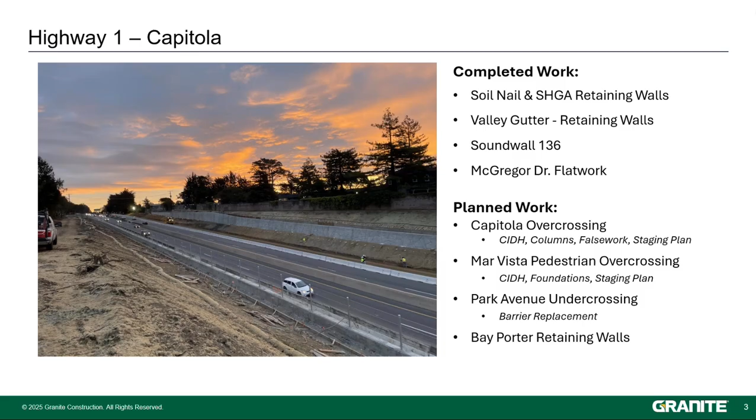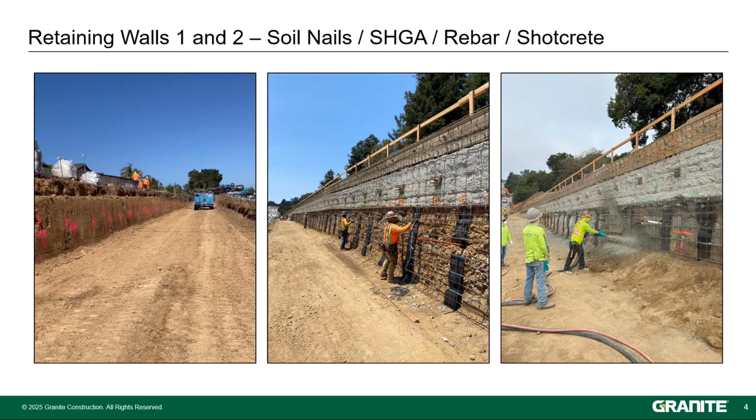Now, going back to this first one, on day 1, I remember sitting with Brian Nassar. He was trying to explain to me quantity claiming, how to scheme it, how to do different percentages, and I was trying to wrap my head around what a soil nail was, and it kind of all went over my head. I was new, I didn't know a lot. And by the end of this, I was tasked with developing the field operation report for this.

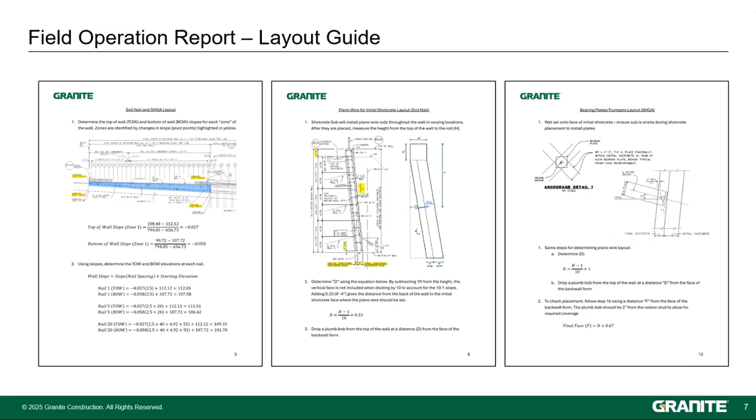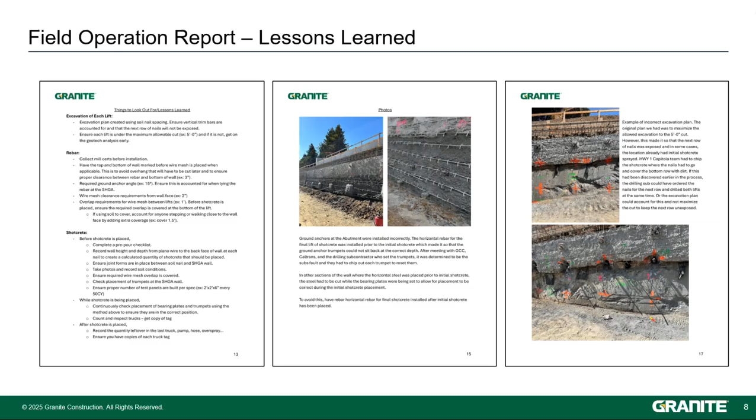And all of these photos have sections on what we encountered, what was difficult with it, what was wrong about it, how we fixed it, and also a section on if we could go back, how we'd avoid it in the future. So the hope of this is if Granite's building another wall like this in the future, this is a helpful resource to make sure those mistakes aren't repeated. Once those walls were complete, we did the valley gutter that runs the whole length of both walls.

We had in the morning the take 5 going over the overhead power. We talked about falling. Safety was a big thing here just because there was a lot going around. But this was one of my first concrete pours, aside from shotcrete, that I got to be a part of. So it was a learning experience, setting it up, being up there early, making sure light plants were set up. But this was a helpful thing that I learned a lot from.

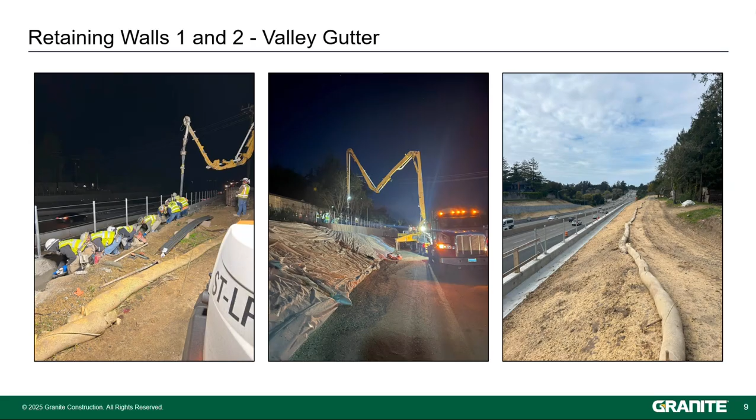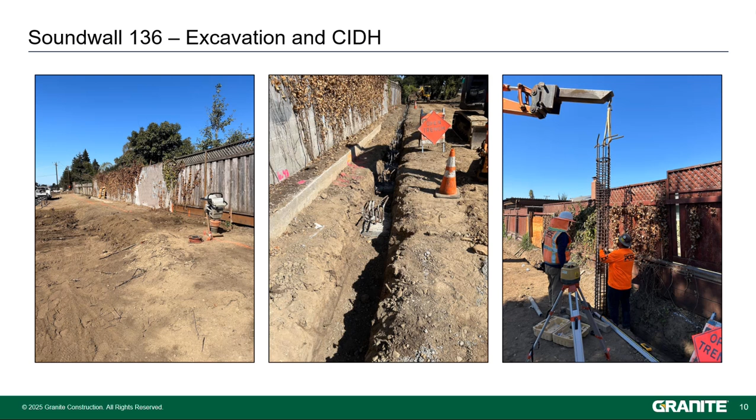We also did a sound wall, 136. So this is the photo of what the site looked like when we got there. We neat cut the trench and had our drilling sub come in and install the CIDH, which then got passed over to our mason foreman, who set up this rebar template for the vertical steel coming out. We spent a lot of time planning how to do this template to make sure that steel came out exactly where we wanted it, so that they were on the center of the cell of those mason blocks.

Just because our superintendent told us some stories about having them not line up and how it's difficult to go back and fix that mistake. So this was a big emphasis of the work plan. Then it got passed off to our mason sub, who came in and set the blocks. And then this is that finished wall that is on site today.

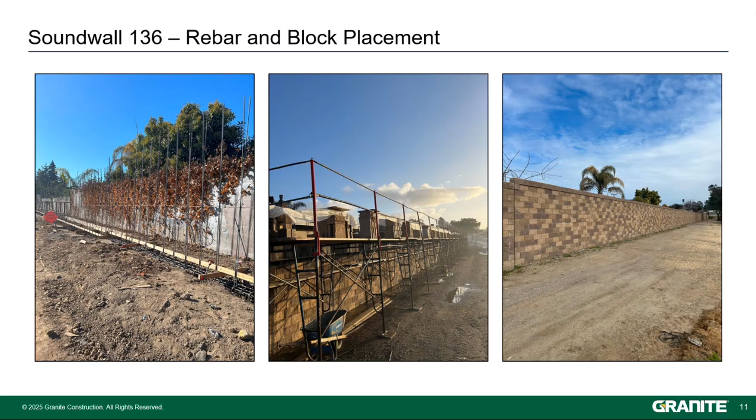So another big thing that I've been working on the last couple months has been work planning. Right as I'm leaving, we have 2 structures starting, as well as a bunch of sound walls. So I've been digging into a lot of the work planning for that. The Park Avenue undercrossing I took the lead on, where we are removing the existing barrier on the outside edge of the bridge passing on Highway 1.

This is a very complicated piece of work where we have Park Avenue, which is a county road running under the bridge, and Highway 1 running on top of it. So traffic control and working through how we're going to do this work, either night shift or day shift, and when we're going to get people in there with access, has been complicated.

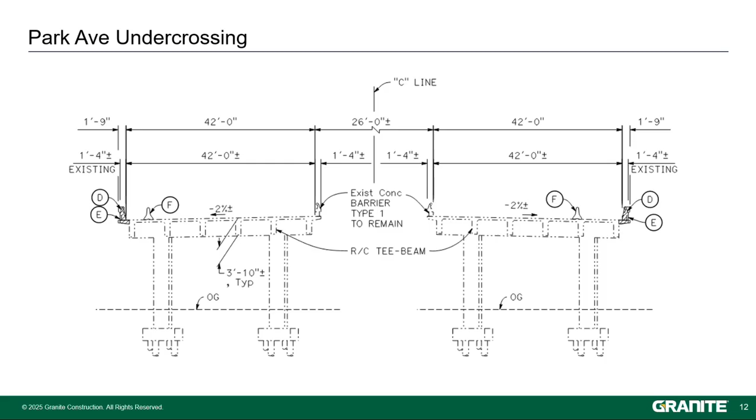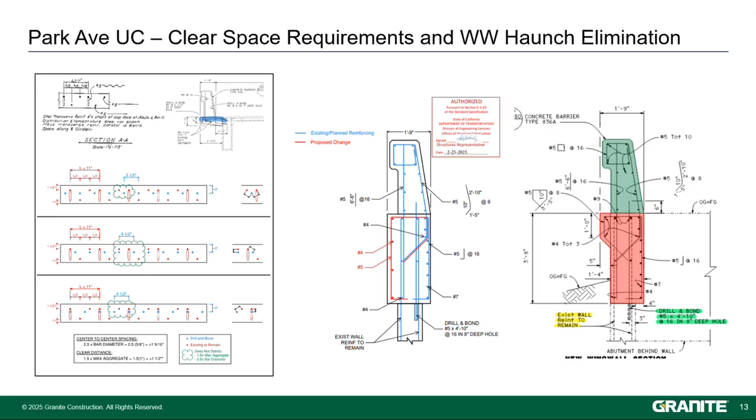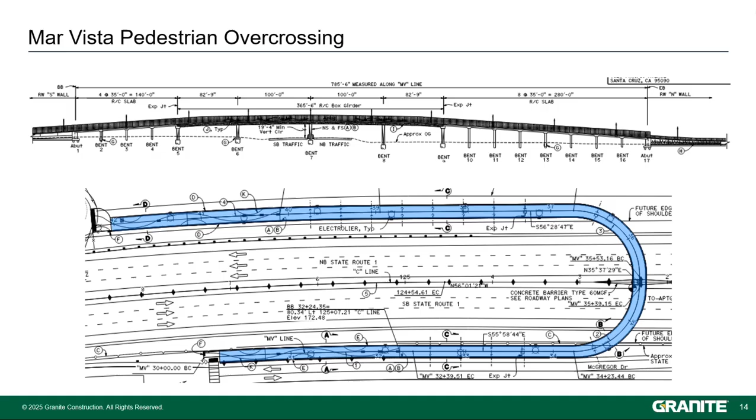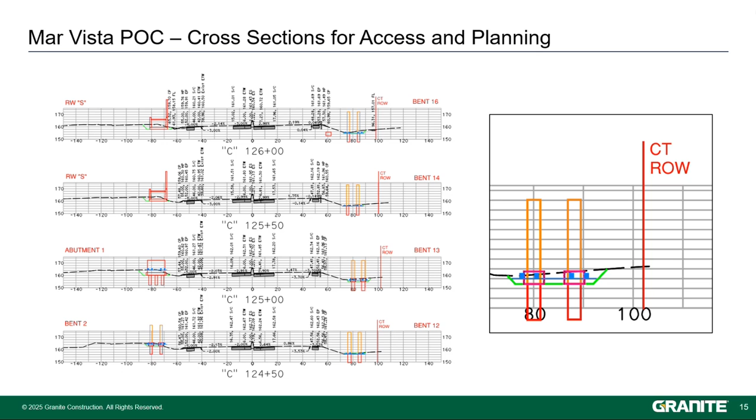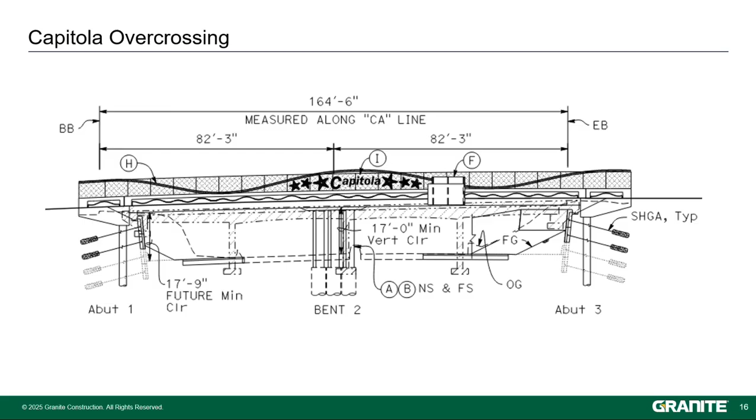Last bridge is the Capitola overcrossing. When I got here, the abutments and the wing walls had already been poured. We worked on those retaining walls, the sub-horizontal ground anchor walls. And right now we're getting set up to mob in to do the CIDH for Bent 2. So I've been focusing on the staging and the work plan for these.

And these also have helped me learn the bridge themselves. I was new to learning structures plans. I'd never really seen them outside of a classroom. And getting in there and turning it from the 2D on the paper to a cross section that shows every component to scale at elevations has helped me build these in my head to make sure we're not missing anything in the work plan.

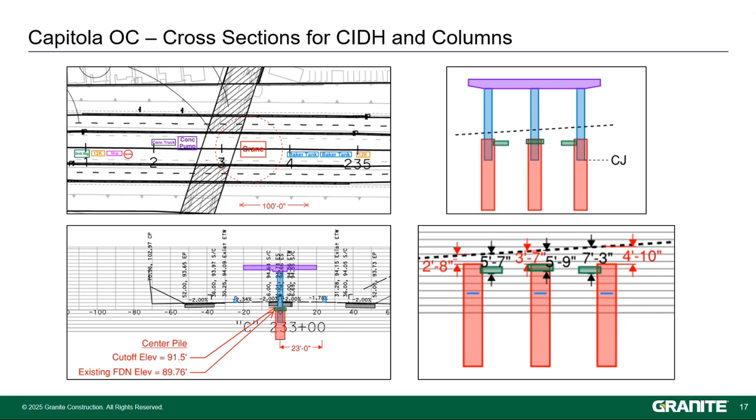And then wrapping up my section, just some lessons learned and advice I've been given, as well as some feedback for the boot camp. One thing that I've heard through all of the boot camp trainings, either it's NEO or Structure Center of Excellence, was the idea of being dependable. It's something that I keep in the back of my head every day, that if I say I'm going to do something, I need to make sure I follow through and do it. That builds trust with the crews and the team members. And it's been something that I think has helped me be successful in my role.

One of the engineers on my job gave me the advice of answering the phone, even if it's 8 p.m. at night. Either you're going to learn something new when you pick up the phone and someone comes to you with a problem, or you're going to figure out how you're going to learn something new to get the answer for someone. Asking questions has also been pivotal.

I'm a new engineer. I don't know a lot. I'm still learning. And I found that some of the questions I ask, even if everyone in the room already knows the answer, it has often led to conversations that have steered the plan of how we're going to go about something. It's led to RFIs. It's led to things that have been overlooked by others, where asking the question that may seem dumb actually most of the time helps. And then also just developing relationships.

It's been clear that people can either put you in a jam or help get you out of one. We've been working with a lot of subcontractors, a lot of Granite crews, and having a relationship with the people in the field as well as those in the office helps the job tremendously. That's something that I am going to continue working on as I go to Sacramento, is developing my relationships with a new region and a new team.